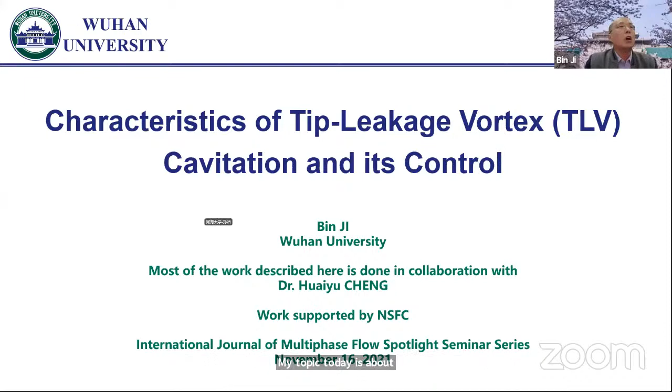My topic today is mainly about the characteristics of tip-leakage vortex cavitation and its control. This is the outline of my presentation today.

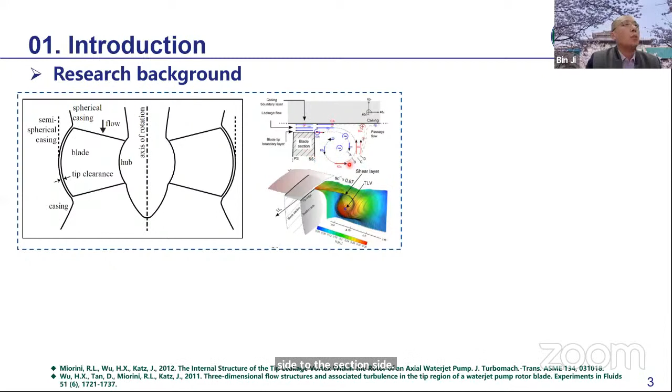It is well known that in actual hydraulic machineries, the gap between the blade tip and the casing is generally indispensable. Due to the pressure difference between the pressure side and the suction side, part of the fluid near the tip may pass through the gap and move from the pressure side to the suction side, and this flow is called the tip leakage flow. It will induce complex vortex structure near the gap.

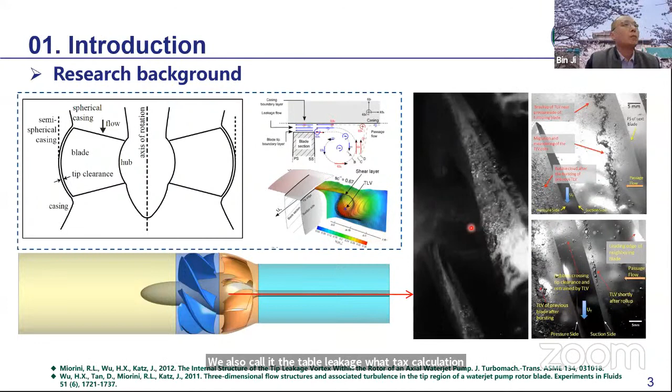The pressure in the core of a vortex generally is quite low, and if the pressure is low enough, cavitation will happen, just as shown in these videos. It is called a tip-leakage cavitating flow. Sometimes we also call it a tip-leakage vortex cavitation, here abbreviated as TLV cavitation. Once TLV cavitation happens, it will significantly affect the local flow structure, which will not only lead to the decline of the performance of hydraulic machineries, but also significantly enhance vibration, noise, and cavitation erosion.

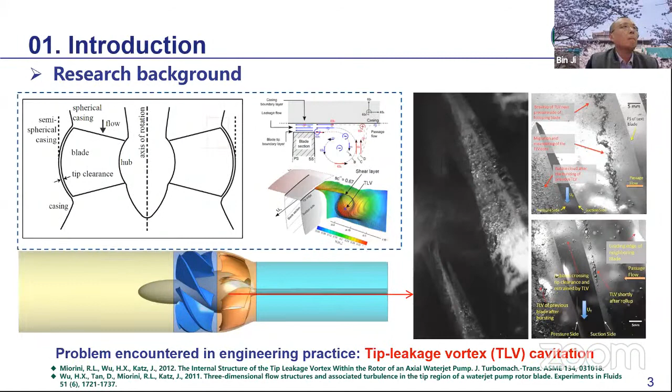In the past decades, many researchers have carried out a lot of research work, such as TLV in rotating machinery and cascade single blade. This investigation indicates that the TLV cavitation induced by a single blade can reflect the main characteristics of leakage flow inside rotating machinery, and the law obtained is also applicable to rotating machinery. Compared with rotating machinery and linear cascade, the geometry of a single blade is simple, making it easy to carry out a series of fine measurements and numerical simulation.

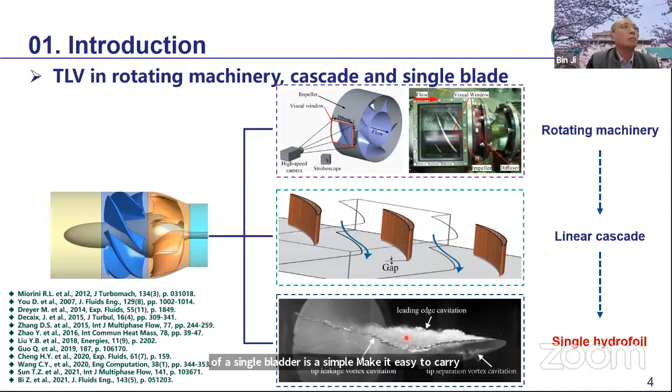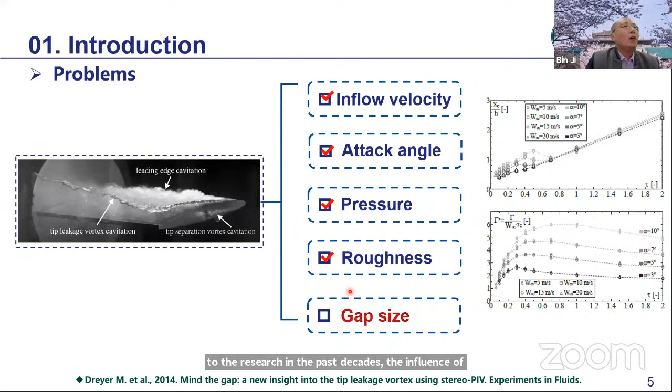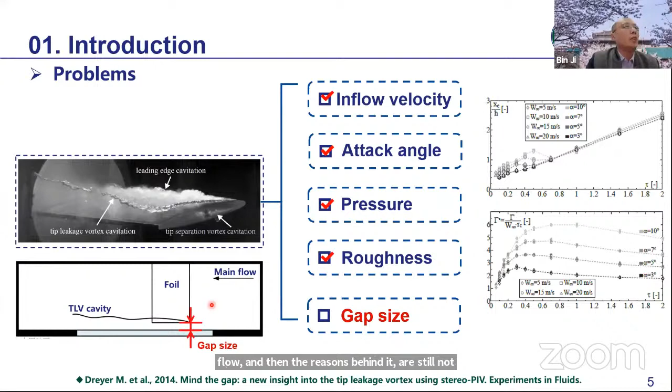It should be noted that the tip-leakage vortex cavitating flow may be influenced by a lot of factors such as incoming flow, incoming velocity, attack angle, and reference pressure, and surface roughness, and gap size. Thanks to the research in the past decades, the influence of these factors has been understood well, while how the gap size influences the tip leakage flow and the reasons behind it are still not clear. Therefore, our study is mainly focused on the influence of gap size on the tip leakage flow.

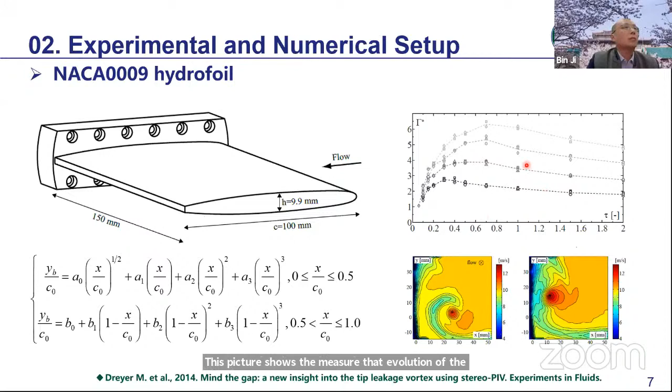This video was provided by Dr. Dreyer. This is the tip leakage vortex, abbreviated as TLV. This is the TLV cavitation. This is the tip separation vortex, abbreviated as TSV. This is the TSV cavitation. This is the sheet cavitation.

A series of measurements in the cavitation tunnel of EPFL is conducted. This data could be a valuable reference for our numerical simulation.

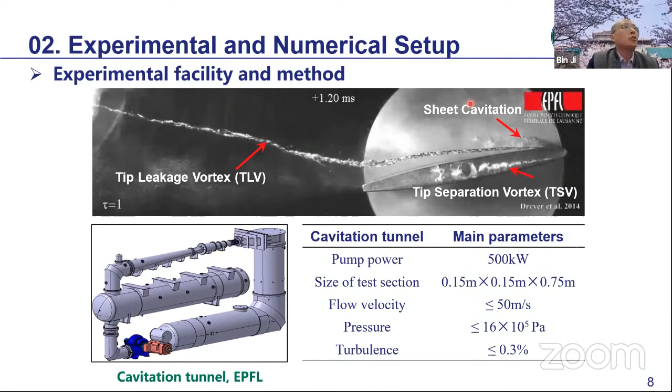This is the computation domain in our current simulation. This is the direction of incoming flow. The speed is set as that in the experiment. The chord length is 100 millimeters. The attack angle is set as 10 degrees.

In our simulation, the Schnerr-Sauer cavitation model combined with the LES is utilized for the simulation of TLV cavitation. It should be noted here, the normalized tip clearance tau was used. This value is defined as gap size over maximum foil thickness.

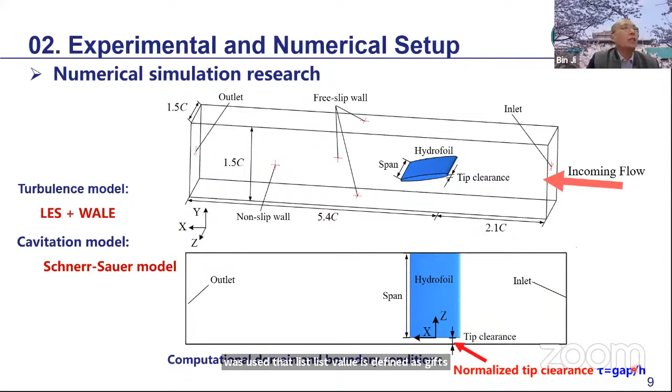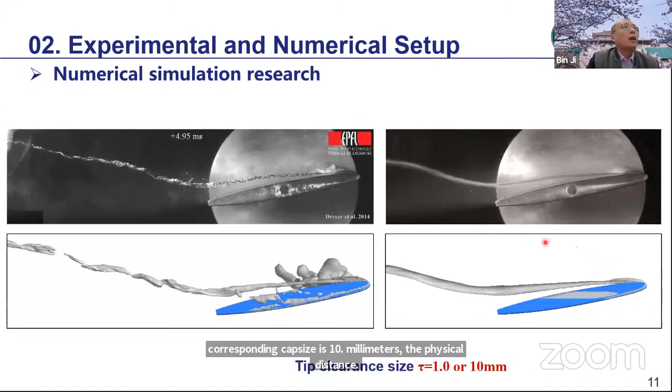This slide shows the comparison between the experimental and numerical results. The corresponding gap size is 10 millimeters in physical distance. The left is the video for the instant. The right is the time average one. As we can see, a quite good agreement can be obtained, and the development of TLV cavitation is captured quite well.

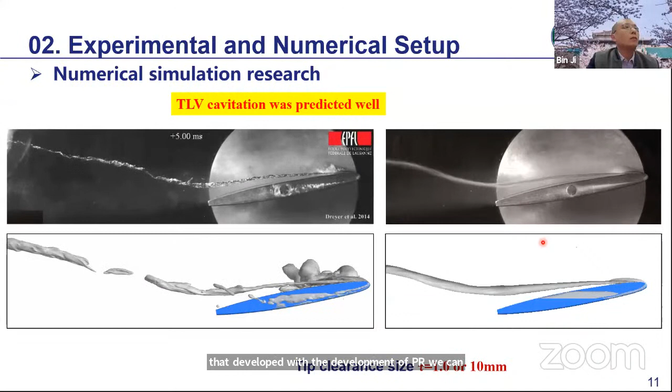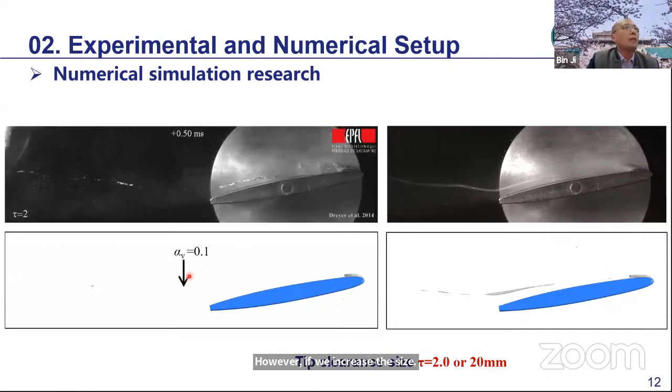However, if we increase the gap size, the strength of TLV cavitation will be significantly underestimated. As shown in this slide, if the gap size increases to 20 millimeters, the predicted TLV cavity is much weaker compared with the high-speed video. It seems a little strange for us. We didn't change any numerical setup, but just increased the gap size, and the method didn't work anymore. That is the motivation for the following work, and we should find the reasons.

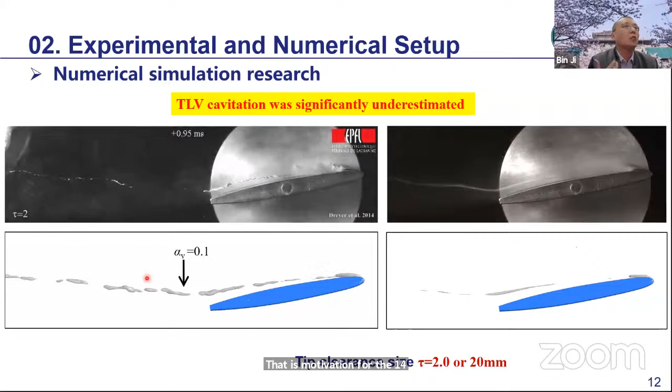Then we go to the third part of my presentation. We proposed a new cavitation model. It should be noted here, the tip-leakage vortex flow is very complicated, and many factors may influence the prediction of TLV cavitation.

Moreover, in this case, the foil tip is set at the middle of the cavitation tunnel, so the influence of the wall can be ignorable. This case is very simple and is helpful for us to think about the simulation of vortex cavitation. Another advantage of this case is that it is very friendly for mesh generation.

Firstly, we can generate a coarse mesh, and then specially refine the cells around the tip vortex for several times. A quite good mesh with high quality can be obtained. In our simulation, the cell number for the basic mesh is only about 1.3 million. After 4 times of refinement, the cell number increases to near 12 million. Most of the increased cells are around the tip, which is good for the simulation of tip vortex cavitation with limited computing resources.

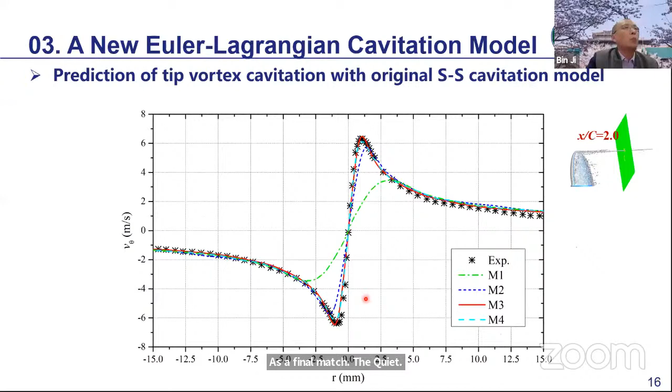We compared the predicted tangential velocity distribution around the tip vortex by 4 case meshes with the measured data. It indicated that with the refinement of the mesh, the numerical result gets closer and closer to the experimental data. For the mesh case M3 or M4, the difference between the predicted and measured tangential velocity distribution is almost negligible. Therefore, we choose M3 as the final mesh. A quite good prediction for the tangential velocity distribution is obtained with M3.

However, when we check the predicted tip vortex cavity, the result is not so satisfying. For example, for the cases with cavitation number equal to 2 or 1.5, the tip vortex cavities are both significantly underestimated, just like the problem we faced in the simulation of TLV cavitation.

We try to find the reasons and analyze many possible factors, such as the predicted time-average pressure and the pressure fluctuations. But it seems there's no problem for the prediction of the pressure field.

Finally, the nuclei around the tip vortex attracts our attention. Many researchers, for example a recent POF paper by Chen from Zhejiang University, have indicated that tiny bubbles with non-condensable gas may roll up around a tip vortex and get trapped in its core due to the pressure gradient force, as shown in this picture. Such bubble migration leads to an increase of gas concentration near the vortex core, which may significantly modify the local cavitation process.

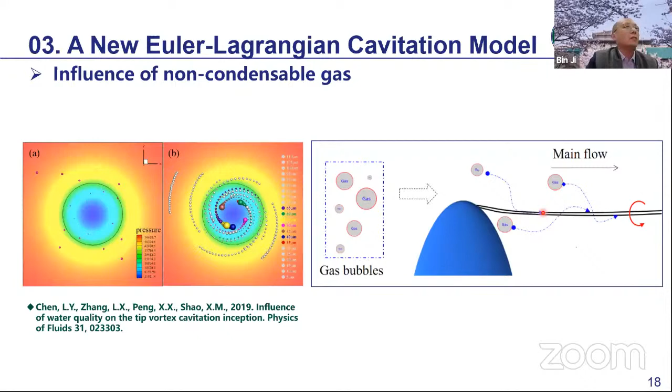To capture the change of gas concentration near the vortex core by nuclei migration, we conduct a simulation with the so-called discrete phase model. We released many tiny gas bubbles upstream, and the movement of these tiny bubbles will be described by this DPM equation.

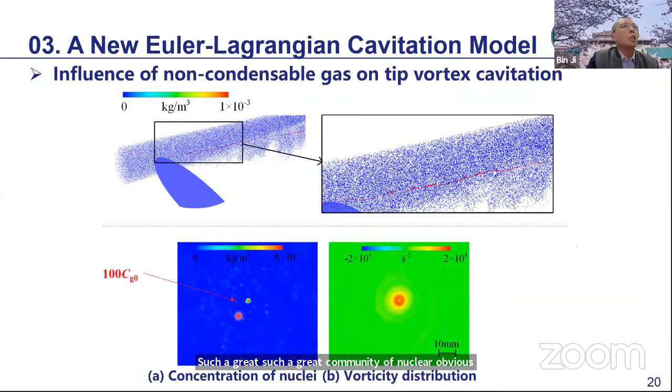This slide shows our numerical results. It is very clear that the concentration of gas bubbles around the tip vortex has significantly increased. According to our numerical results, the concentration of nuclei at the tip vortex center may be increased up to 100 times the initial concentration. Such a great concentration of nuclei obviously will influence the local cavitation process.

However, when we look at the derivation of our now popularly used cavitation models, such as the Schnerr-Sauer cavitation model or the ZGB cavitation model, these two models are both based on a simplified RP equation. We can find that in the simplified RP equation, the partial pressure of non-condensable gas is omitted directly, which means these models cannot reflect the influence of non-condensable gas.

Someone may argue that there are some model parameters, such as alpha NUC in the ZGB model, that represent the cavitation nuclei. However, it should be noted that such kind of parameters are unified for the whole flow field, which is far away from the real case. So it is necessary to find a more reasonable way to reconsider the influence of cavitation nuclei in the simulation of tip vortex cavitation.

If the reason for the underestimation of tip vortex cavitation is the omission of gas partial pressure in the original model, the solution here is clear: that is to include the gas partial pressure in it. Here, the pressure in the bubble includes two parts, PV and PG. The PG is the new term we added.

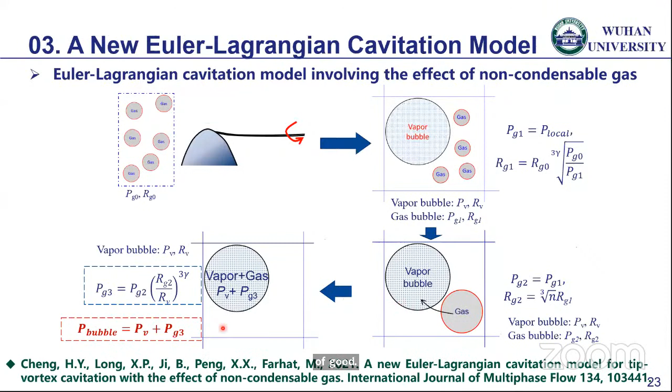This slide shows how we consider the influence of gas partial pressure in the cavitation model. It includes the migration of gas bubbles and their merging with vapor. During this process, the perfect gas law in adiabatic state is utilized to describe the growth or collapse of gas bubbles, and the total pressure after the merging is recalculated according to the law of partial pressure.

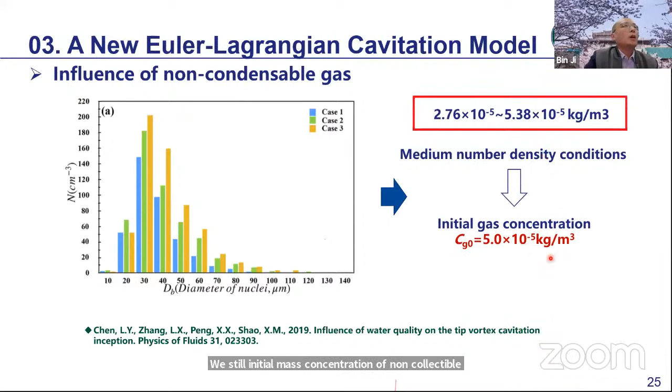Obviously, any attempt to model cavitation taking into account the non-condensable gas requires knowledge of the initial gas content. According to independent measurements, the mass concentration of nuclei is in this range. In the current study, we assume an initial mass concentration of non-condensable gas with this value, and we mark it as CG0.

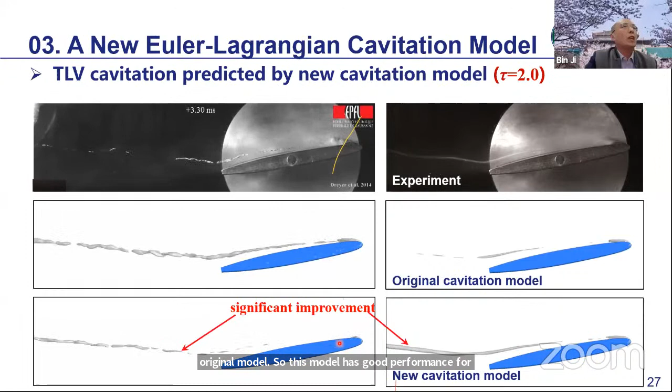With this new model, we recalculate the TLV cavitation with a large gap size, which is significantly underestimated by the original model. This is the original model prediction, and this is the new cavitation model prediction. As shown in this slide, left is the instantaneous view, the right is the time-averaged one. A significant improvement in the prediction can be obtained compared with the original model. So this model has good performance for the prediction of tip vortex cavitation and TLV cavitation, especially for large gap size.

Based on the above numerical method, we then discuss the characteristics of TLV cavitation.

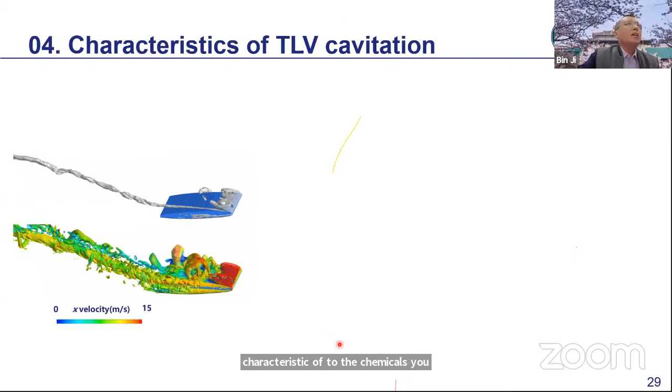This movie shows the typical evolution of TLV cavitation and a vortex structure in a tip-leakage flow. Three distinct vortex structures in the tip-leakage cavitating flow can be clearly observed, including TLV cavitation, which is the tip-leakage vortex cavitation, and TSV, which means tip separation vortex and induced vortex.

TSV is formed due to the flow separation on the foretip at the pressure side and moves towards the suction side due to the tip leakage flow and roll up of TLV. Therefore, TSV has the same rotational direction as TLV.

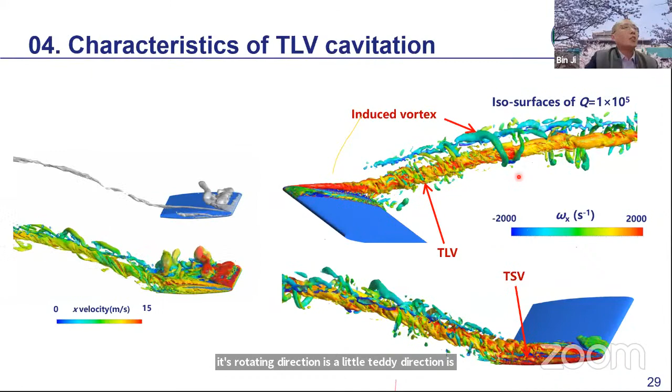Induced vortexes are formed from the end wall. Here, this place is the end wall. Induced vortex are formed from the end wall by TLV, and its rotating direction is opposite to that of TLV, which will accelerate the dissipation of TLV.

These three movies show the development of TLV cavitation and the corresponding vortex structure with three typical gap sizes. We can find that TLV cavitation and the corresponding vortex structure can be significantly modified by only changing the gap size.

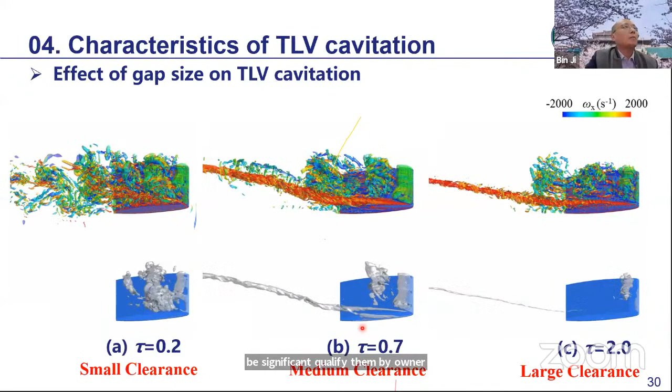For small clearance, as shown in this slide, due to the great pressure difference between the pressure side and the suction side, the velocity of the leakage flow is rather high. Moreover, the gap is quite narrow, so there is no enough space for TSV to roll up by itself. Therefore, TSV merges with TLV almost from the leading edge.

Further downstream, the extremely proximity of TLV to the end wall leads to complex induced vortex, which has a strong dissipation effect on TLV. And the TLV can just sustain till half the chord.

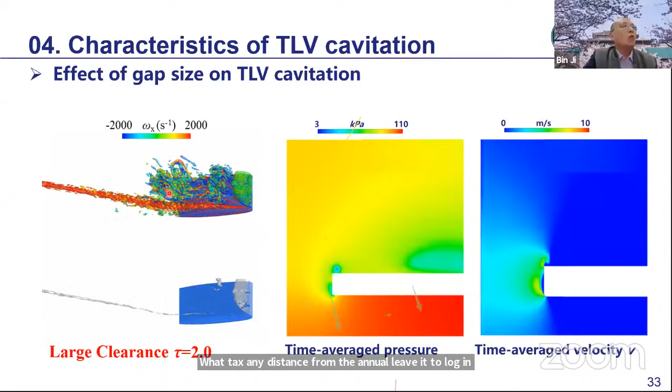The low strength of the mixed vortex and its distance from the end wall lead to low intensity of the induced vortex, which cannot even be displayed by the isosurface of the Q criteria. Therefore, the TLV cavity for large clearance is more stable compared with the case with small or middle clearance.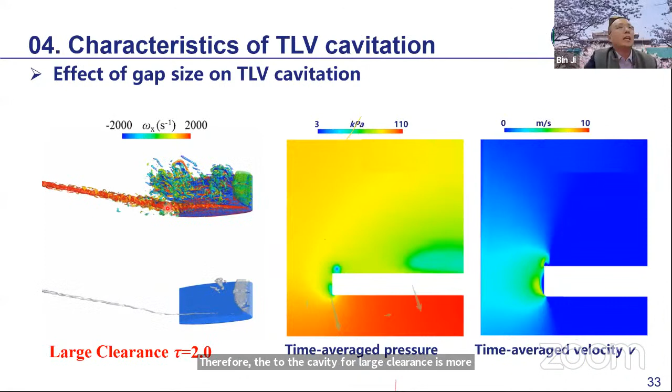The previous discussion showed that the interaction between the TLV, the TSV, and the induced vortex significantly influenced the development of the TLV cavity. At the same time, the evolution of TLV cavitation will also influence the distribution of local vorticity.

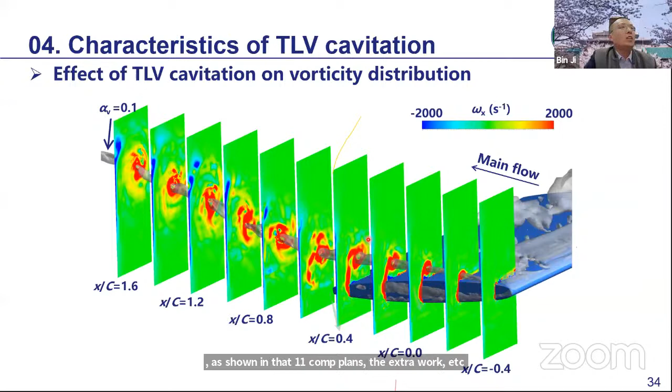This picture shows the axial vorticity distribution at the typical moment for middle gap size. As is shown in the 11 cut planes, the axial vorticity inside the cavity decreases as the TLV cavity develops downstream. To see it clearly, we choose three typical cut planes as shown in this picture.

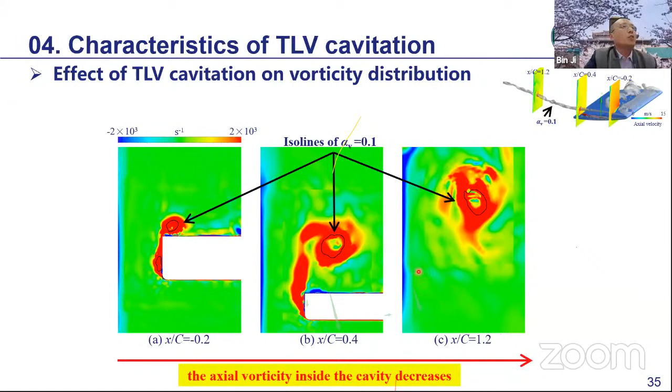However, at the sections with X over C equal to 0.4 and 1.2, the axial vorticity inside the cavity becomes lower. The reason for this phenomenon is not yet clear. To answer this question, the vorticity transport equation is employed in our following discussion.

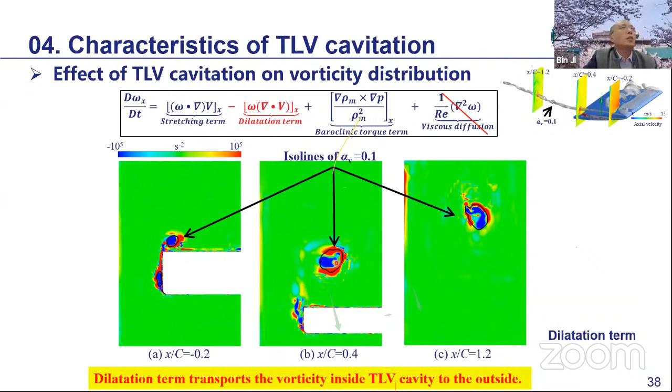However, the dilatation term around the TLV cavity is positive. Thus, the effect of the dilatation term is to transport vorticity from inside the TLV cavity to the outside, which is the reason for the decrease of the vorticity inside the TLV cavity.

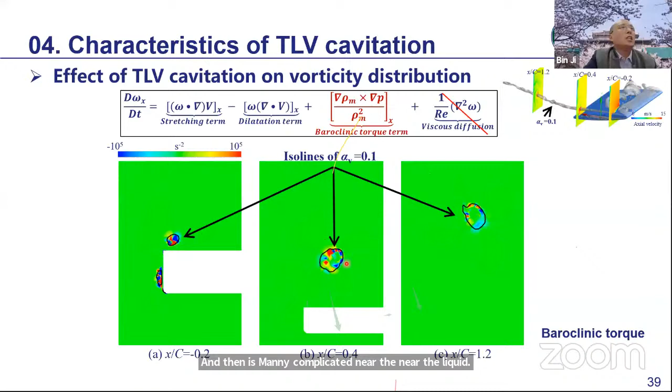The baroclinic torque term is much smaller compared with the stretching or the dilatation terms in the tip-leakage cavitating flow, and is mainly concentrated near the liquid and vapor interface. Thus, the pressure and density gradients are not badly misaligned in the current case.

Another issue that has attracted much attention in studies of cavitation is the cavitation and turbulence interaction. However, due to the complexity of tip-leakage cavitating flow, there have been fewer reports on the interaction between cavitation and turbulence in this kind of flow.

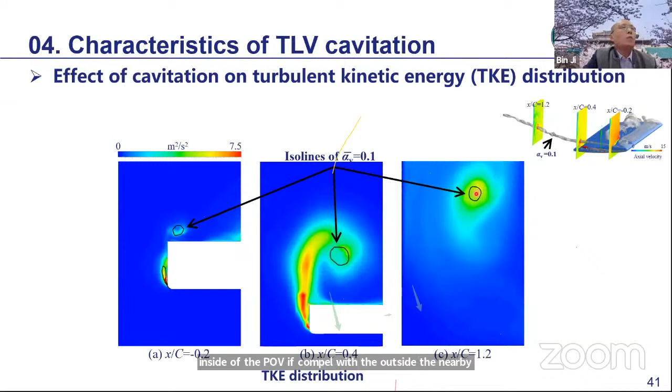According to measurements from Johns Hopkins University, turbulence kinetic energy, abbreviated as TKE, inside the TLV core is higher despite little local production, but the reason behind it is still unknown. In our case, as shown in this slide, a higher distribution of TKE can also be seen inside the TLV compared with the outside nearby region, which is similar to the measured result from Johns Hopkins University.

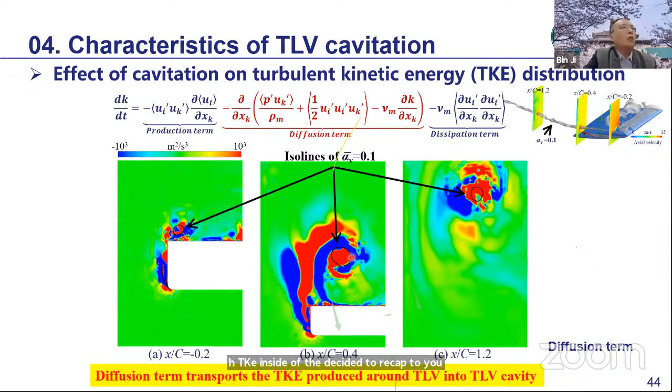This slide shows the distribution of the diffusion term of TKE. Inside the cavity, the diffusion term of TKE is positive and high, while outside it is negative. This kind of distribution suggests that the high TKE inside the TLV cavity is transported from the nearby region to its inside.

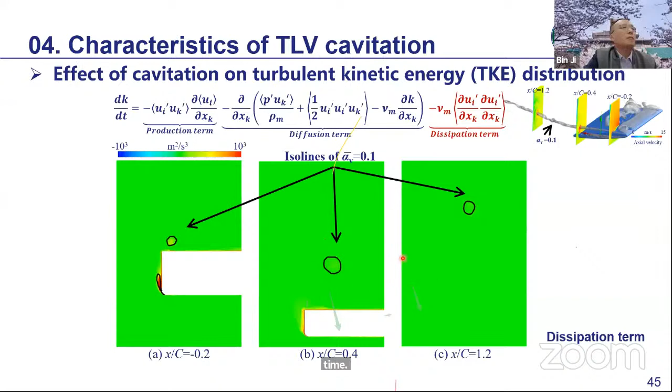In the last section, we discussed the characteristics of TLV cavitation. For engineering applications, there are urgent requirements for how to control or suppress TLV cavitation. Over the past decade, several flow control strategies have been proposed to mitigate TLV cavitation in hydraulic machines.

These strategies can be divided into two categories: active control strategies such as water or gas injection, boundary layer suction, or their combination, and passive control strategies, including tip or casing treatment, vortex generators, and winglets or tip extensions. Anyway, these methods are not always so satisfying in practice.

Among these methods, two kinds of control methods attract our attention. One is the so-called anti-cavitation lip, which is a metallic piece attached to the tip of the blade on a Kaplan turbine. It is reported that this device may increase the radius of the TLV and further suppress TLV cavitation. This device can work well with large gap size; however, if the gap size decreases to very small, this method is ineffective.

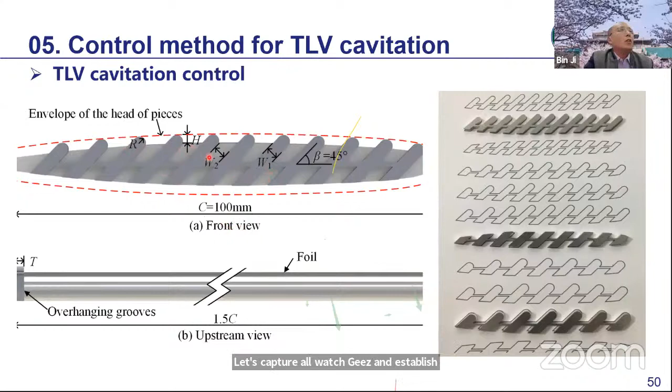Based on this idea, the so-called overhanging grooves, here abbreviated as OHGs, are proposed as shown in these pictures. Similar to the conventional CGs, the OHGs are obtained by attaching several tabs. The several tabs connect with each other by a slender beam. The difference between the CGs and OHGs is that OHGs extend beyond the suction surface, which is similar to the anti-cavitation lip. The structure of OHGs and several key parameters is shown in this slide.

This slide combines the observation of TLV cavitation for the baseline, the ACL, and the CGs and OHGs with different gap sizes. The experimental results indicate that the ACL can weaken the strength of TLV cavitation at the middle and large gap size, but no remarkable difference is observed between the baseline and the ACL case when the gap size is small. For the case with CGs and OHGs, both show a better performance on TLV cavitation suppression at a small gap size compared with the ACL case.

With the increase of the gap size, the suppression effect of the CGs is not as good as that of the OHGs. It should be noted that unlike the grooves at the end wall, the CGs in the present investigation are attached at the blade tip, which suggests that the leakage flow may be disturbed by the CGs even with increased gap size. In a word, our OHGs show a satisfying suppression effect on TLV cavitation within the entire range of gap sizes. Moreover, due to the simple structure, the OHGs are also easy to implement in hydraulic machinery with very low cost.

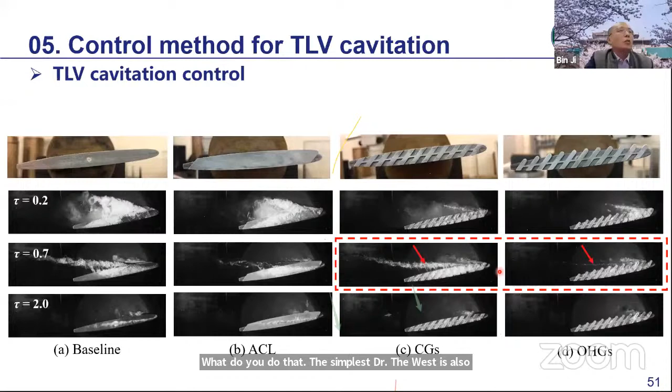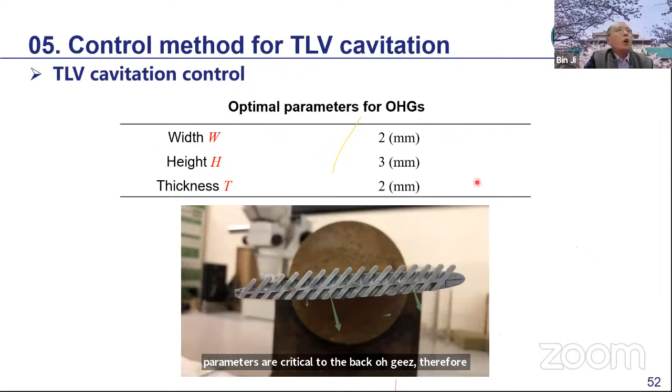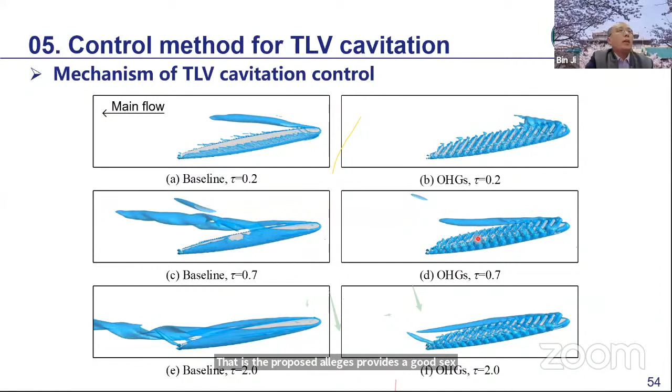A deep investigation about the mechanism for the suppression effect of OHGs on TLV cavitation is also conducted. In short, for small gap size, for example in the first line, the strength of TLV will be weakened due to the increase of the flow resistance in the gap by OHGs. For middle and large gap size cases, for example the second line and the last line, the radius of the TLV is increased due to the existence of the part beyond the suction side of the OHGs.

That's the proposed OHGs providing good satisfying suppression on TLV cavitation over a wide range of gap sizes. Recently, our group is trying to check its effect in actual hydraulic machinery, and I will share with you once we have new results.

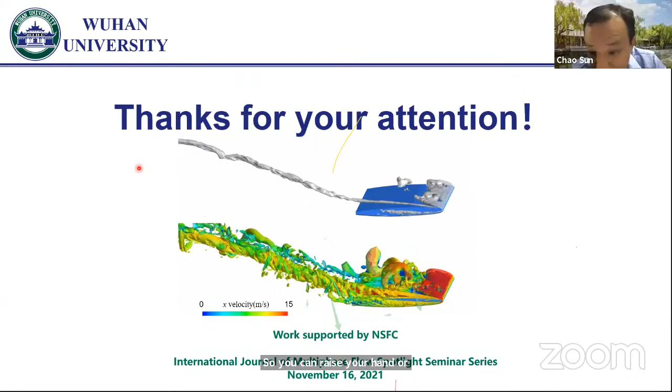Okay, hello then, Professor Sun. Yes, okay good. This is Chen Wu, okay thank you Professor Sun. This is Chen Wu from Beijing Institute of Technology. Thank you for organizing such a wonderful presentation for us, and also thank you very much for Professor Ji's such a wonderful presentation. I think Professor Ji's topic is very interesting, and I have several questions I want to discuss with Professor Ji.

So the first question is, how do you consider the non-condensable gas in the numerical simulations, such as how to decide the initial gas concentration like CG0?

Yes, thank you very much for your question. In our simulation, the non-condensable gas bubbles are released upstream, and then their migration will be calculated by the discrete phase model like this. Okay, I'll show the slides.

Like this, their migration will be calculated by the discrete phase model, the DPM model, in which the drag force, gravity, and the pressure gradient force are considered. As for the initial gas concentration CG0, the value should be decided according to the water quality in the cavitation tunnel. In our case, we don't have the equipment for measurement of nuclei.

But we found some reference. According to one POF paper by Zhejiang University, they suggest the mass concentration of nuclei, so we followed Chen's work. Thank you very much for your question.

Thank you, Professor Ji. I also have another question. As you mentioned, both the vorticity transport equation and the turbulent kinetic energy equation have been adopted in your research. I wonder, is there any relation between them? For example, is the stretching term in the vorticity transport equation corresponding to the production term in the kinetic energy equation?

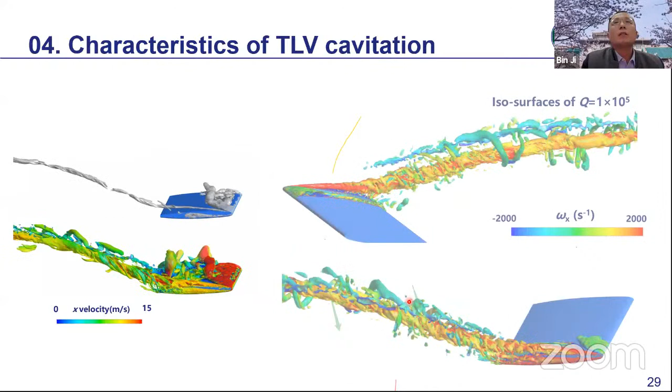Okay, thank you very much for your question.

This question is very interesting. To be honest, we didn't consider the connection between the vorticity transport equation and the turbulence kinetic energy equation before. According to my knowledge, the stretching term is possibly enhancing the local turbulence, so it may be possible there is some relationship between the distribution of the stretching term and the production term.

We may later check this problem in our case. Once we have some findings, I will share with you. Thank you, Professor Ji.

Okay, so we have another question from Professor Yu Sheng Zheng. You can unmute yourself. Okay. Hello, Professor. Thanks for your great presentation.

I have two questions. The first question is about the physical difference between an experiment and a numerical simulation. In experiment, there is strong fluid and structure interaction between the hydrofoil and the cavitating flow. The tip-leakage vortex or leading edge cavitation may lead to deflections or vibrations, which feed back to the flow field, while in numerical simulation, only fixed wall conditions are considered. So the question is, why can the influence of fluid and structure interaction be ignored in your simulation case?

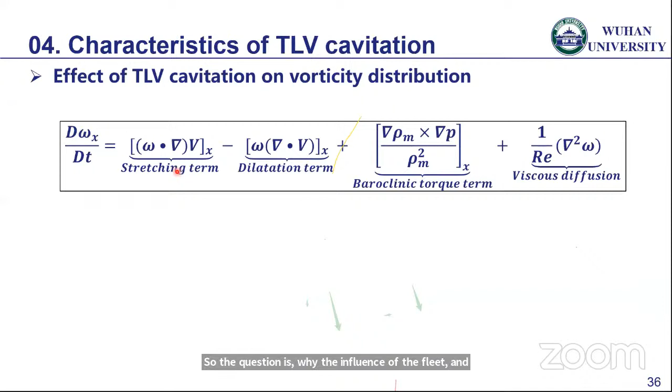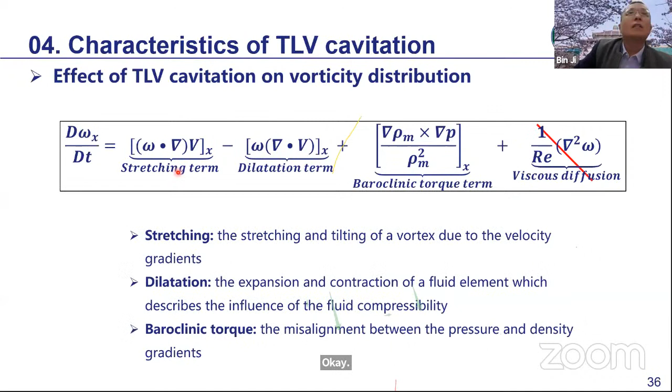Okay. Okay, thank you very much for your questions. Maybe, thank you very much for your question.

Cavitation is a very complicated flow phenomenon involving many complex flow phenomena. Just as you point out, the fluid and structure interaction between the hydrofoil and the cavitating flow may be very strong in experiment. So if possible, it may be necessary to consider the influence of FSI in the simulation of cavitation. However, in our case,

it is difficult to consider. It's difficult to consider FSI. We simulate the TLV cavitation without considering the FSI effect. So maybe later we will consider this. Thank you very much.

Okay. Thank you for your answer. Professor, I have another question.

The question is about the application of the control method for tip-leakage vortex, because the investigation is carried out on a hydrofoil, which is a non-rotating structure. For pumps and turbines, the blade is rotating, and the velocity of the tip can reach as high as 40 meters per second, which is much higher than that in the hydrofoil case. So the second question is, what will be the difference by taking the rotating effect into consideration?

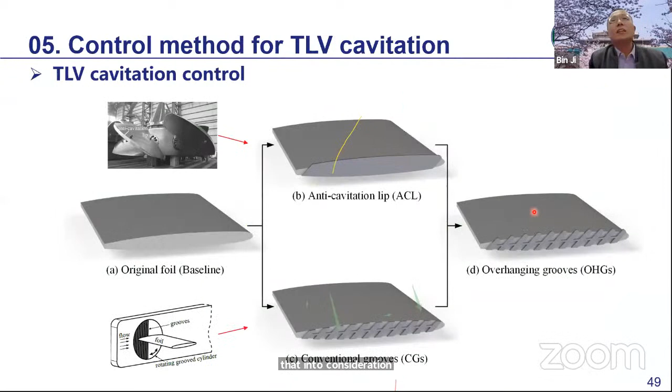Okay, thank you. Thank you very much for your question. I will show your slides.

Okay, for the rotating effect on the control method, I agree with you. The rotating effect will be very strong in pumps or turbines. For our present case, we didn't consider the rotating machinery, but one of my students is conducting numerical simulation for the OHGs, as this OHG is in a pump. I will share with you if I have some findings.

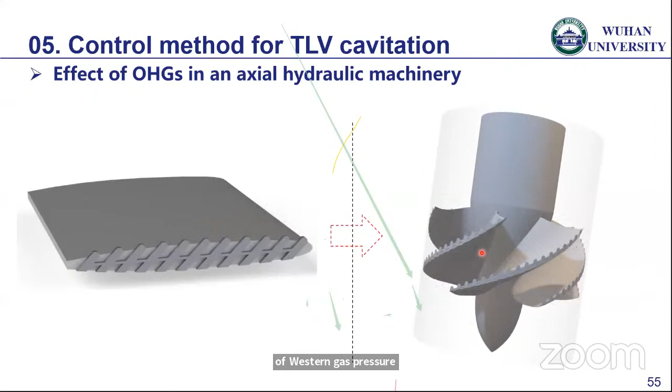Thank you very much for your nice talk, Professor Ji. I'm Yun Qiaoliu from Shanghai Jiao Tong University. I'm not so clear, how do you connect gas concentration with the gas pressure? Do the bubbles grow when they enter the vortex core, or do they merge?

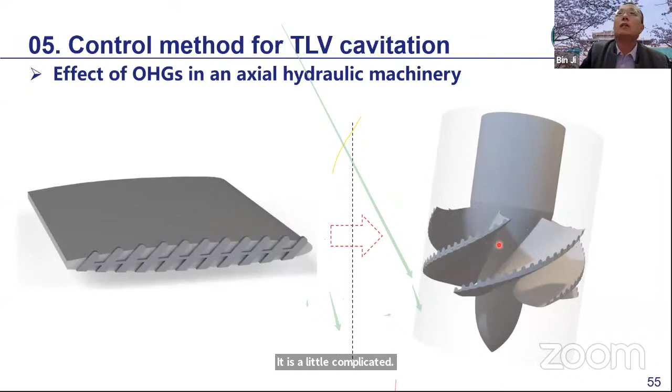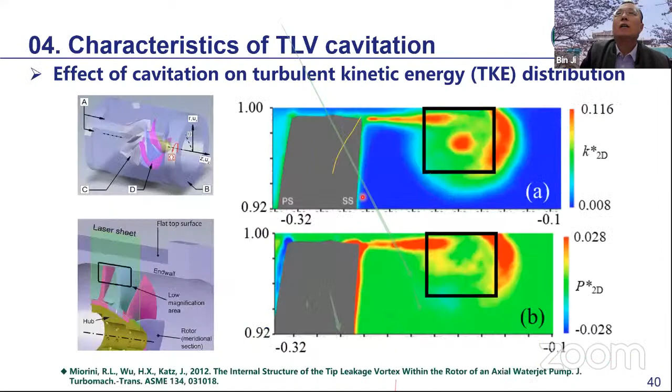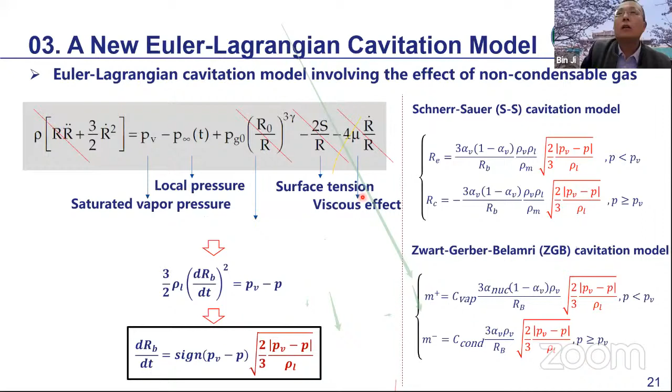Okay, thank you very much for your question. It is a little complicated, I need to show the slide. Okay, thank you very much for your question, it is a little complicated.

To be simple, a higher partial pressure of non-condensable gas can be provided if there is more gas. If there are more gas nuclei, the total pressure of the bubbles can be higher and higher, and then a higher local pressure is needed if one wants to suppress the growth of these bubbles. In other words, cavitation is easy to happen. This is to build the connection between the gas concentration and its partial pressure.

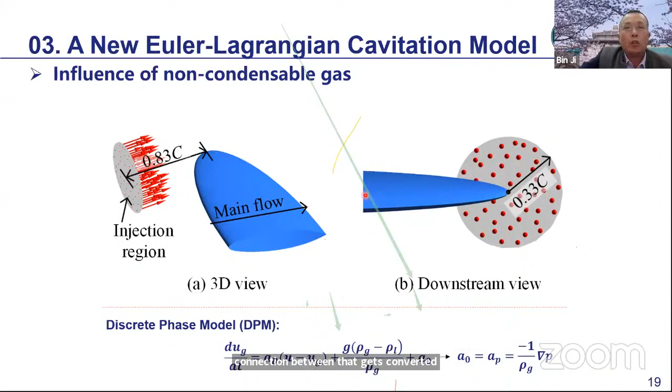The ideal gas law in adiabatic state is utilized, and the total bubble pressure after the emergence is calculated according to the law of partial pressure. For more detail, you can refer to our recent IJMF paper. Thank you very much.

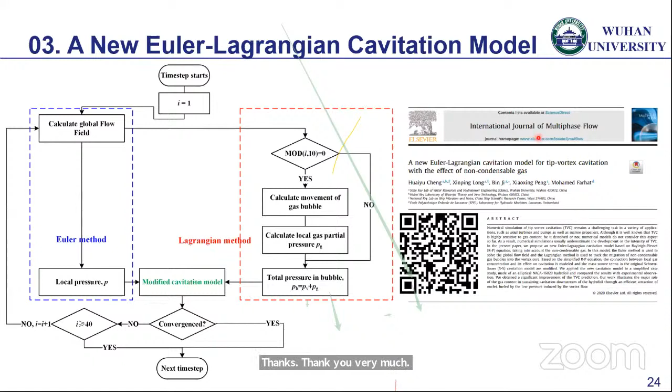Hello, Professor Ji, thank you. I'm Zhao Xiaoyang from Beijing Institute of Technology, and I am very deeply impressed by your great work. Thank you for your presentation, and I have two quick questions. The first one is, how did you refine the mesh around the hydrofoil and the tip-leakage vortex region? Can you tell us some knowledge or experience?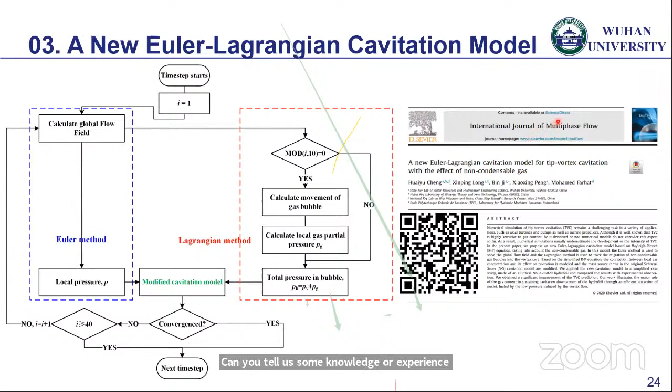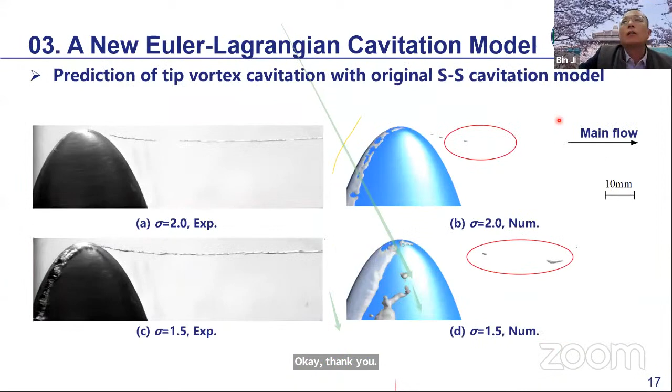Thank you very much for your question. Here we use the Cartesian cut-cell method. This method is very easy for mesh self-adaptation. With self-adaptation, we can easily refine the area we care about.

Here we refine according to some variables, I cannot remember exactly which. We refine it very carefully, and finally we can capture the vortex cavitation in detail. So that's my answer, thank you very much.

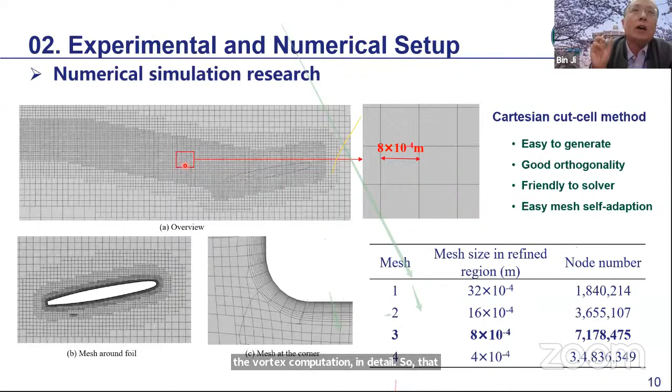Okay, there is another question. The overhanging grooves have shown significant influence on the TLV cavitation, and the angle of the grooves is 45 degrees in your research. Is it the best angle?

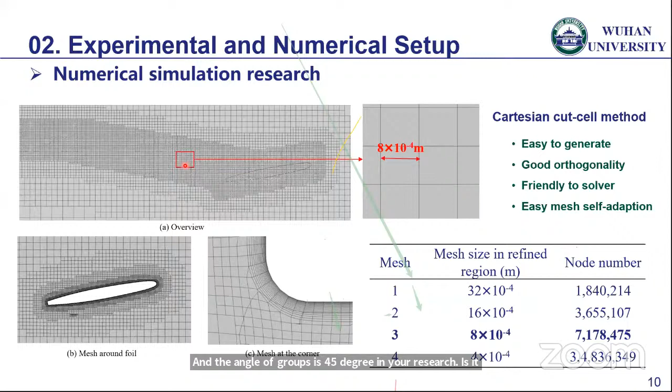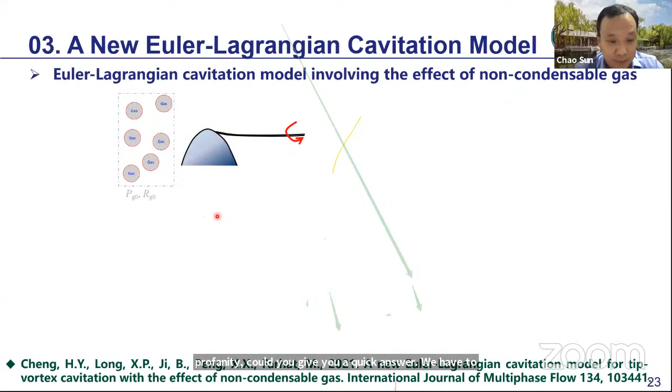I need to show the slide. Here. Yeah, thank you very much for your question.

For the choice of this angle, we referenced the work by one PhD student from EPFL. They carried out detailed experimental measurements, and they found that this groove with 45 degrees is the best angle. So here we just refer to the EPFL result, we didn't do the research about this ourselves.